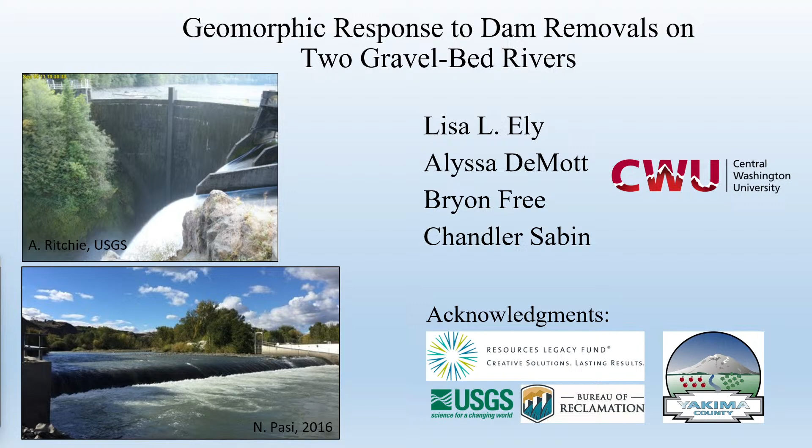Two dam removals in Washington State. At first glance, they look pretty different: the enormous, tall dam on the Elwha River in western Washington, out on the Olympic Peninsula, and then some of you probably recognize the Nelson Dam here on the Naches River. I'm going to be looking at what was the effect of these dam removals on the river itself, and I'm not going to focus as much on the fish. I heard you heard about fish last week more, but obviously the river has a big effect on the wildlife and the habitats and the creatures that live in and around the river.

So let's get going here. Okay, so Glines Canyon Dam on the Elwha River. It's tall and narrow. It was the tallest ever dam removal at that point in U.S. history. The Klamath River dam removals that just happened in the last couple years are, in terms of the volume of dam, bigger, but this one I think was still taller than the tallest of those.

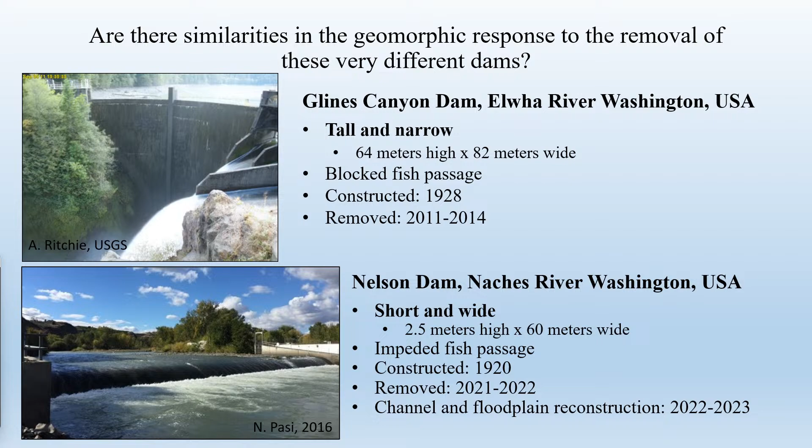How can you compare this? You know, Nelson Dam, it's not nearly as tall. But there are some similarities and differences, and we'll go over those as we progress through these two. I wanted to show the Elwha first because it gets so much news and it's really exciting. But the local dam removal, as we'll get to in the second part, maybe in some ways has a bigger impact because there are a lot more of these smaller dams around the country than there are the really big splashy ones.

Okay, so here we go, the Elwha River, the Elwha Glines Canyon Dam being removed in real time—no, in sped up time there. So I don't know if you missed that. You're going to get another chance in a minute for a slightly different view.

Before we go on, I just want to mention some of the important things with this. They took it down incrementally. This black line is basically the dam elevation going down over time. It actually started a year before this, but the first year, the dam was just going down through the water, the pool of water in the reservoir. So as far as the river is concerned and the impacts on the river, things really started happening when the dam removal first intersected this big pile of sediment that had been accumulating behind the dam for 80 years—sediment and large trees, large logs, wood. Keep that in mind as we go forward.

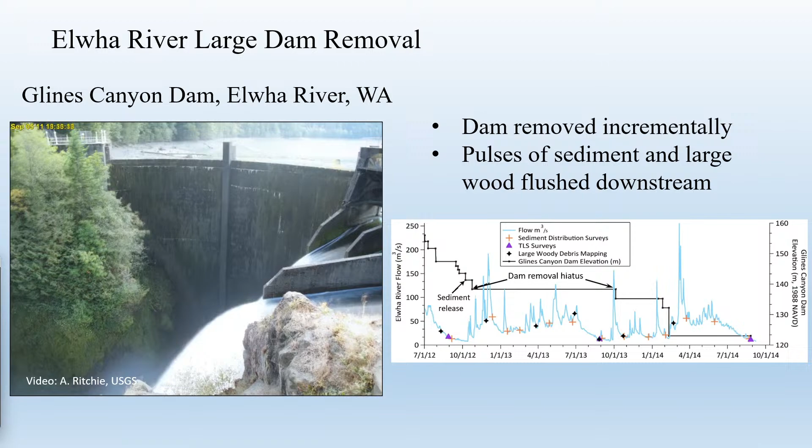Now we get to the point the lake, the reservoir, is gone. The dam's still being removed off screen here. You can see, not much happening here, but keep your eyes on it. See how the river's just going back and forth in that former reservoir lake sediment. Their plan with this was to allow the river to take that out naturally.

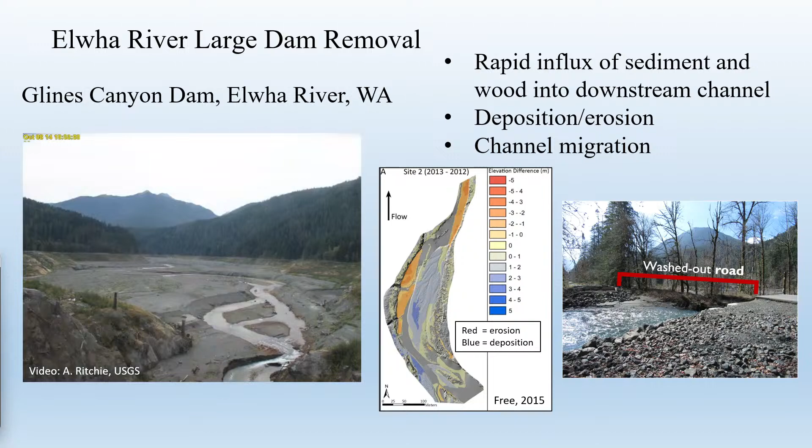Whoa, a big storm event happened there, and it did a big jog to the left. We did a survey out there and lost one of our tripods because I had put it 40 feet away from the edge of the river one evening, and we went back the next day and couldn't find it, because the sediment is so loose the river had actually migrated laterally and took our tripod out. But we saw it later, this orange thing sticking out of a gravel bar in the middle of the river, and we were able to go out and retrieve it.

So that's the excitement on the Elwha, and then just a little bit of what we did.

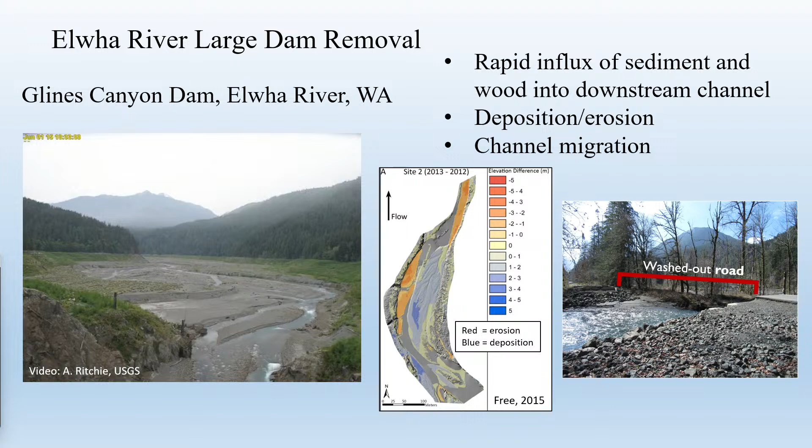So this was Bryon's project. We picked 4 sites downstream of the dam. Here's the dam at the bottom, and the river is flowing to the north. So 4 sites downstream, and then we looked during the dam removal time period at how the river changed in those sites over that time period, three years in this case.

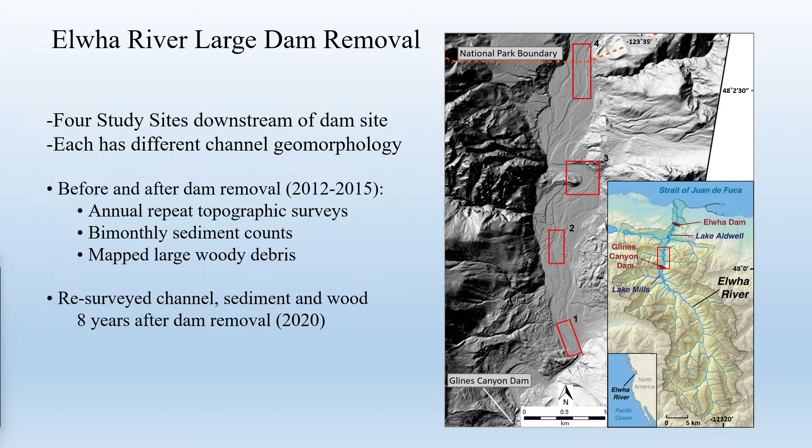And then later, almost 10 years later, my other student, Alyssa, came back and looked at what were the longer term effects.

So we'll just summarize briefly here. What did they find out?

If we look over here, this is before the dam was taken out, before the sediment was released anyway, and it's pretty coarse gravel here. That's because when the river didn't have the power, when all that was coming over the dam was water, it didn't have the tools to move back and forth, which is what allows it to pick up sediment and move it somewhere else. So it's called an armored channel, meaning you've got gravel across the channel bed that's too big for the river to actually move.

So it moves the finer stuff, like sand and silt, through, and then it just stays in one place. It's got an armor on it, and that causes the river to get kind of locked in place. That actually happened also on the Naches River, which we'll get to a little later.

Then, during the same site, this is all the same site, during the middle of the dam removal, you can see that a lot of fine sediment has filled in between some of these pieces of gravel. That happened not only between the gravel, but in some places whole new sandbars or gravel bars formed. So you get a new gravel bar forming where there used to be river channel, and it pushes the river over. That means the river starts eroding in a new place. Now it's introduced new sediment, or new wood falls in, and that makes the river push over the other way. Once you get that process started, the river starts going back and forth, establishing new paths and making, in some cases, multiple channels and a more complex river system with more complex habitats.

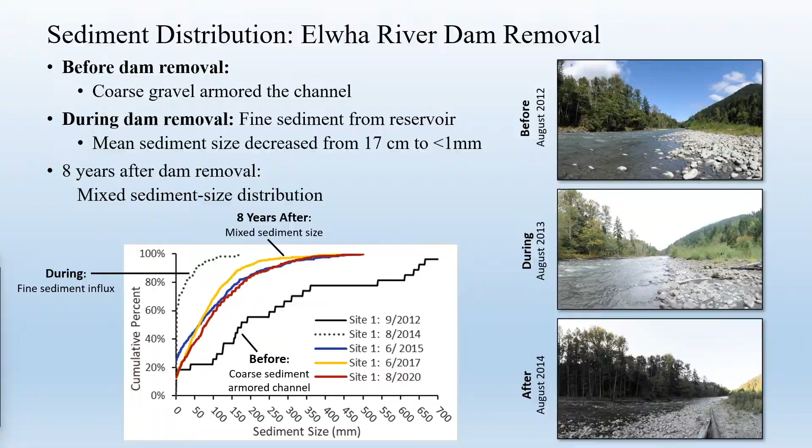During, it gets pushed way over to the fine end because it's this blanket of all that sand that used to be behind the dam got spread out downstream on the river. It basically covered up a lot of those old gravel bars, but it didn't necessarily move them right away.

And then Alyssa's surveys several years later, 8 years after, it's kind of reestablished in the middle between those two extremes. So it's really kind of a Goldilocks situation. That's because it's been able to start mixing that old sediment and the new sediment and come up with a size that is actually appropriate for the river to move and use and shift its channel around naturally.

And did I just turn this off? Okay.

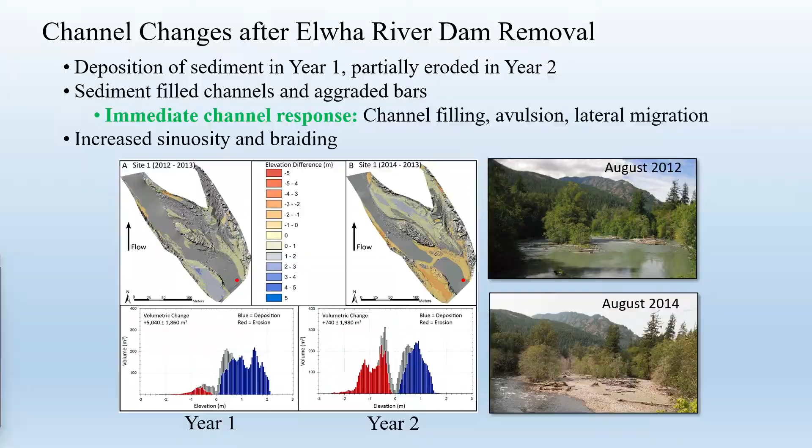And what I don't have a picture of here was there used to be a campground here called the Altaire Campground. This is in the Olympic National Park. There was a campground, and I camped in it when we were doing our field work out here. And we were camped like 2 rows back from the river. And the bathroom was behind our campsite, and then there was another row.

So I think there were like 3 rows of campsites. And by the time we finished, the bathrooms were on the bank of the river. And the first 2 rows were gone. Our campsite was no longer there. So the river did, again, what rivers do naturally, it started moving over to the left over here after, so all this green stuff is the deposition of this gravel here. So things went kind of crazy there.

So another big element with the Elwha Dam removal that was not the case over here is the large wood. So the Olympic Peninsula, how many people have been out there? Yeah, there are a lot of trees out there. Just imagine 80 years of trees that have fallen into the river upstream that got trapped behind the dam, and they're mixed in with the sediment on the bottom of the reservoir, kind of waterlogged. They all get released within a couple of years, and those big logs just got strewn along the channel initially.

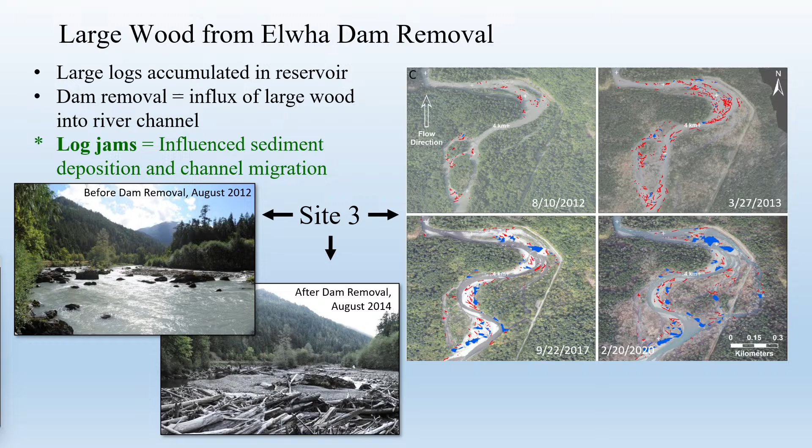Okay, initially then, a whole bunch of individual logs came washing down when the dam was taken out, and then they started gathering together as they were being pushed around by the river, and that's the blue. So the blue are log jams, multiple logs piling up together. And you can see by the end of this series in 2020, you've got way more. So over here, there's only 2 very small log jams in 2012. And by the time we get over here to 2020, it's maybe half and half log jams and individual logs.

So this is down in the lower part. This is August 2014, after dam removal, what one of these log jams looks like. So here's the same site, 2012, nary a log in view. And this is what it looks like 2 years later when there's a big accumulation.

So you can imagine then that these logs also served to push the river around. So you've got sediment deposited, you have log jams. The log jams are actually growing bigger and kind of stabilizing, and then that's caused the river to split or to move around, and it introduces a lot more complexity in the channel response to the dam removal.

So here's just a graph summarizing Brian's and Alyssa's work, and let's just look at a couple of the main points here. So if we go over to these graphs, start with the ones on the bottom, the channel sinuosity and the braiding index. Sinuosity is just a measure of how curly, how circuitous is the route that the channel took. And the braiding is an index of whether it's a single channel, which would have a braiding index of 1. And so it's a measurement of how many threads there are to this river channel.

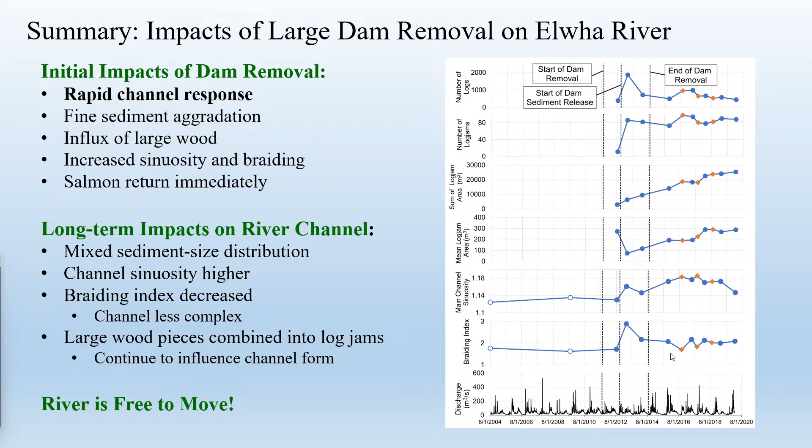So one of the things we've found here is you got this big spike of stuff happening right away, but then, for example, the braiding index, that kind of went back down and it settled at a new number higher than it was before, but it's not fluctuating as much anymore. The sinuosity, that's the curviness, that kind of continued to go up, and maybe now it's going down. It looks like that hasn't really reached a new complete equilibrium yet at the time that we did this study.

And the log jams are kind of interesting because the number of logs has sort of gone down and maybe even decreased a little toward the modern day, but it's not like they're leaving the system. They're just getting grouped up into larger log jams. So the number of individual logs that we mapped went down, but you can see that the area of the log jams continued to go up. So they're basically just getting collected and making bigger and bigger log jams that will probably be there for a longer period of time. So that's, I think, kind of the Elwha story. Yeah, that was our summary.

And I should say down here at the bottom, the river, in this case, is free to move around. It's in a national park. So they tried to keep that road open. And finally, they're just like, okay, river wins. We're going to let it move back and forth and do its thing.

And a little bit about the fish. So a lot of this dam removal was driven by fish habitat because neither of the dams had fish passage. So there were 2 dams. They didn't have fish passage. And I think the fish were there like knocking on the door for this to be taken out, because they reoccupied immediately after the dam was removed. Well, not immediately.

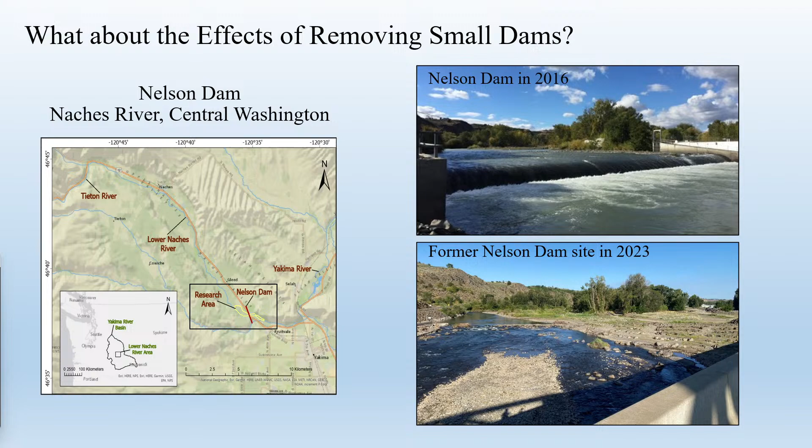Okay, so this part, if we did it right, you will not be blasted out by really loud music. So if you hear faint music, that's intentional. Don't feel like you're missing out on something. And I'm just going to show the first part of this drone flight through the reconstructed channel. But if you want the full experience, you can scan that QR code and you can blast it at home and rock out to the music.

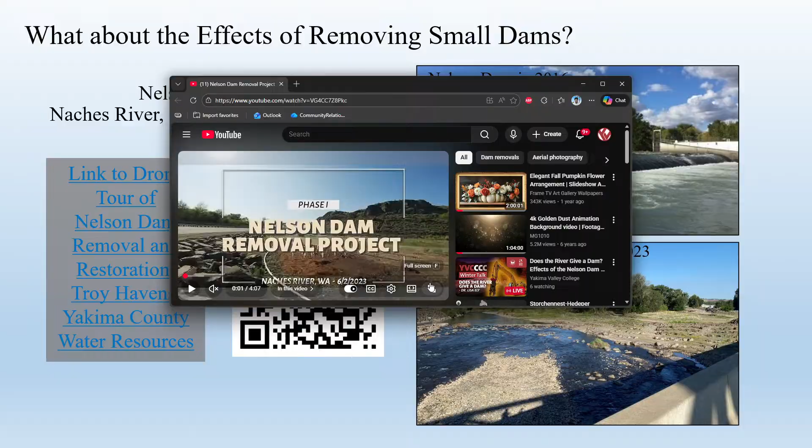Okay, so we're going to try to get this. It's on a YouTube, so I have to go to another site here. Okay, that part worked. I think I have to put this. Oh, okay, so it's not too bad. Whoops, but now I lost it. I'm going to try to get it full here. You might get tired of this music after a while, though.

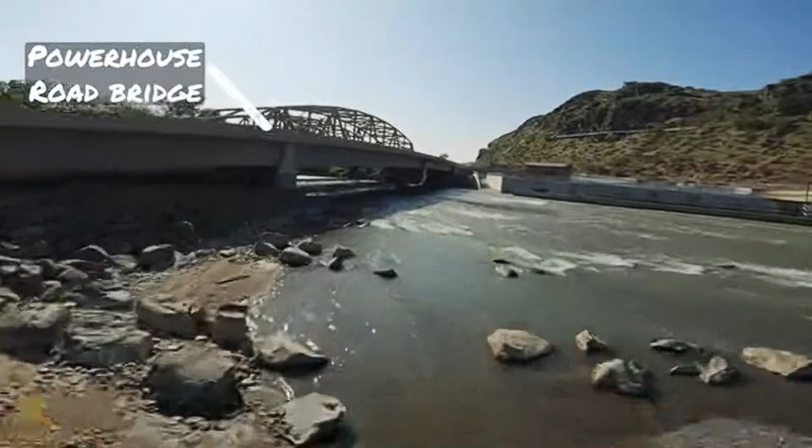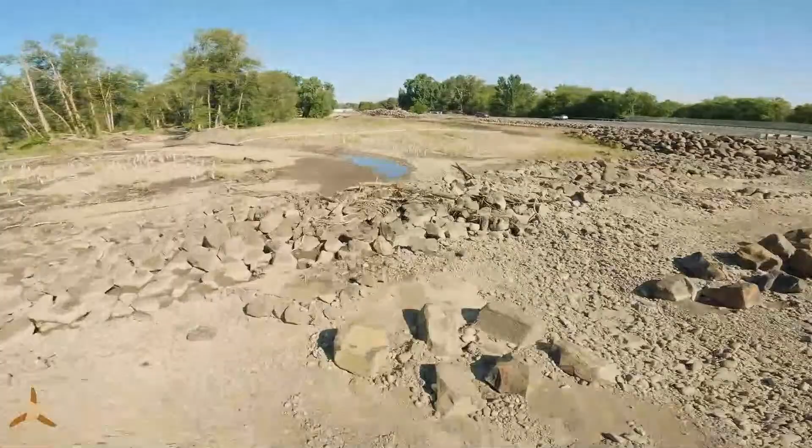So this is where the dam used to be. And then he's going to fly up through this reconstructed floodplain. So part of this was they built a new levee set back from the river, you can see on the right here, and a couple of pilot channels. I have not been out there since the floods last December. So I'm pretty interested to see what happened out there during that event. Planted a bunch of new vegetation. Well, you can read what he wrote on there as well as I can.

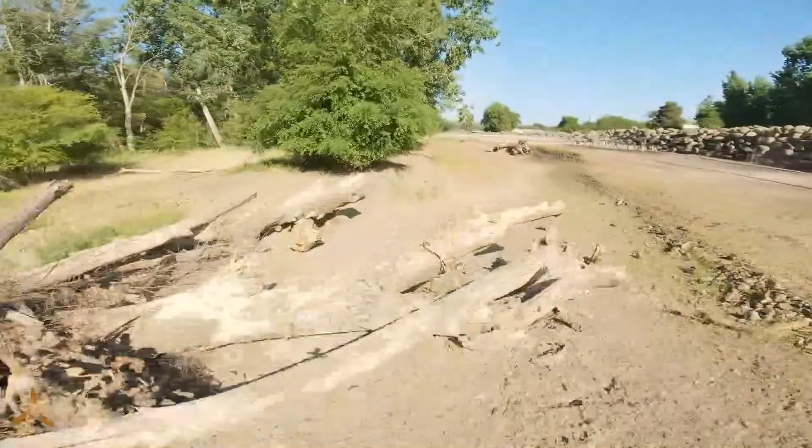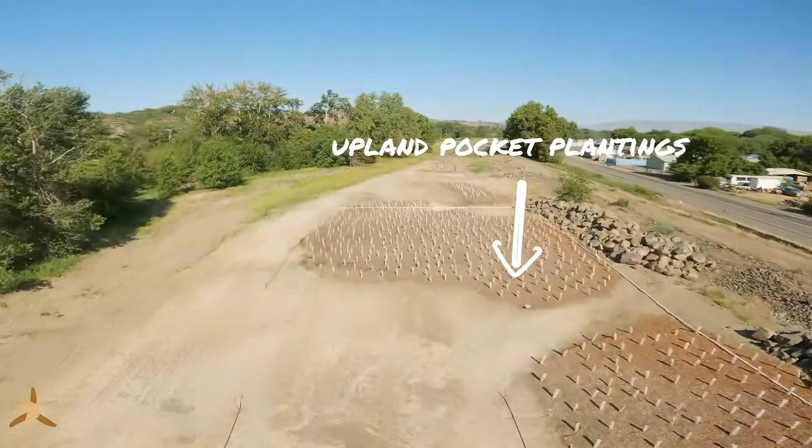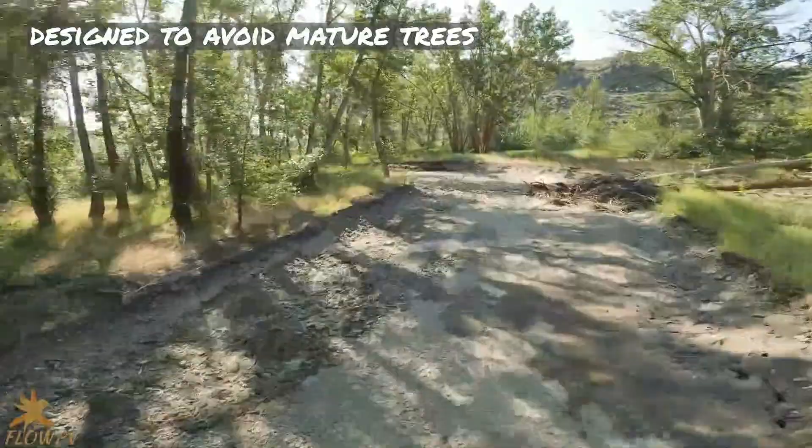So we're going upstream here now. I think we're going to come down. Yeah, so here's the other pilot channel. They put intentionally some large wood in there. But it just means a channel that they'd like the water to go down. So they're kind of saying, hey, when there's a big flood, please come down this way. It's dry most of the time, right? And until this year, I don't think that North Channel had water flowing down it since this project was put into place.

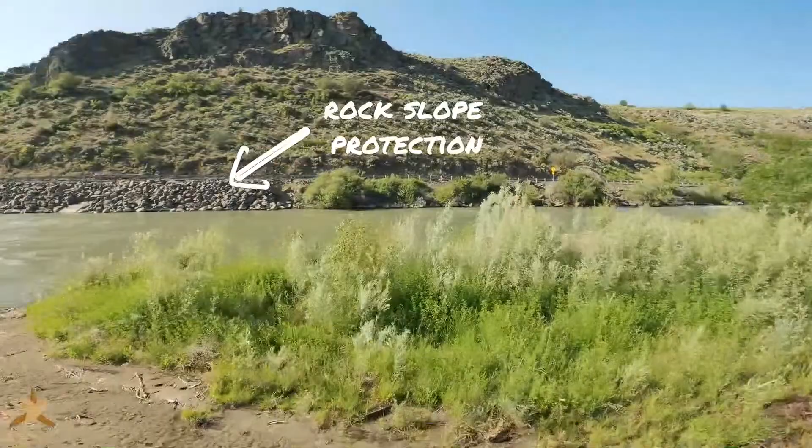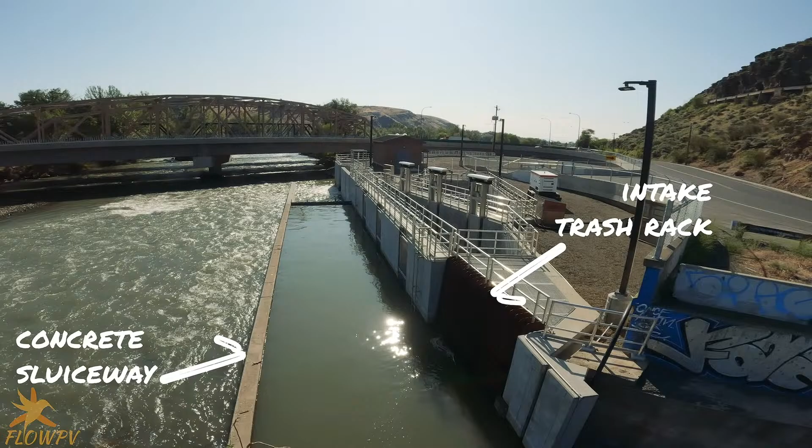Okay, there's the bridge that I'm sure you've gone over, and see how the channel, the water's a lot rougher in this part, more ripply. That's because they put some larger boulders down in there. Oh, I don't know if we want to keep. It's kind of fun to watch, so it's not that long. But if he starts going back up the same place, we'll stop it. So it's a very complex project.

Yeah, I think we're kind of going back up where we already went here. So I'm going to try to. There's the pilot channel. Okay. Oh, you're going to help me here? We can just close it. Okay, that's good. Yeah. Awesome. Thank you.

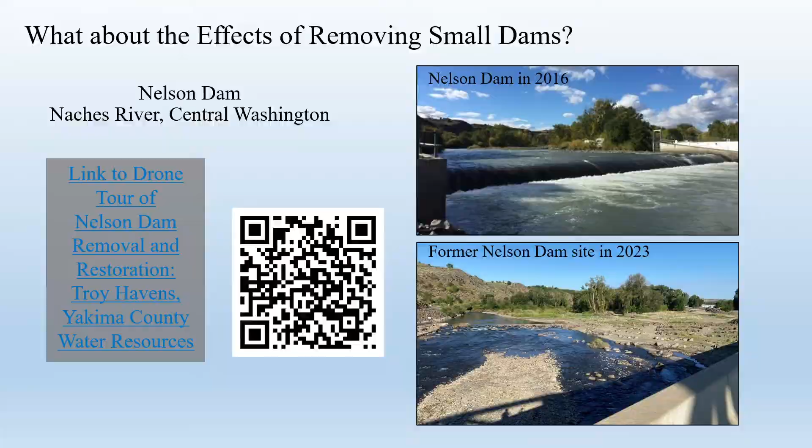So that was put together by Yakima County, giving an overview of the project. Now, let's look at what this one did to the channel. So this is the same thing we just saw, but this is over here before, from just not a very big dam, 8 feet tall, but you had sediment. It allowed sediment over the top because it actually filled up to the top with sediment. So gravel could get over, but it was basically putting this 8-foot wall in the channel.

So you had a wedge of sediment that accumulated upstream for a couple miles. And that at times, according to Yakima County, caused some flooding because you'd basically filled the channel up higher than it would have been naturally, and then a relatively small flood could overtop the old levee and get into areas along the sides where you didn't want it. The fish passage was not great. It apparently filled up with gravel periodically.

So you had this big wide channel upstream that occasionally had flooding, but downstream you had an armored channel similar to the Elwha, where there was large gravel on the channel bottom that was too big for the river to pick up and move on a regular basis. So that's a before, and then here's right after they put this reconstructed channel in that we just saw in the video.

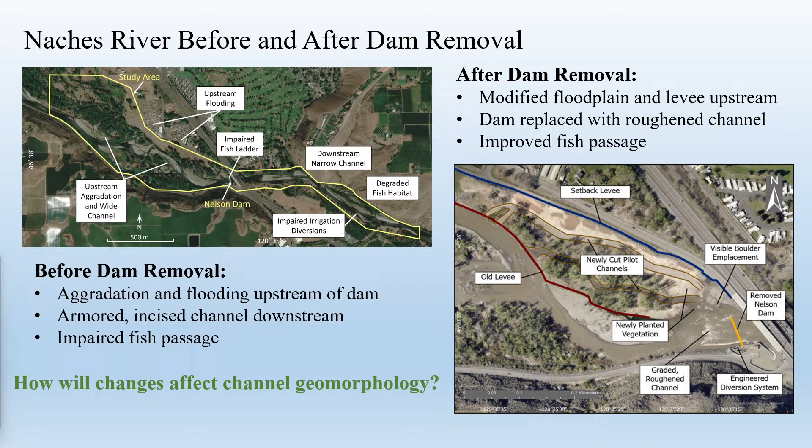So some of the things that they're trying to alleviate is alleviate the flooding here by building a setback levee, allowing sediment to go downstream. Oh man, I really went back there. There we go. But still allowing the diversion. So this is a complex challenge to keep all these different things going.

So we looked at how did it affect the channel geomorphology? Well, this is still ongoing. We don't know the total answer yet. So I brought a bunch of students down there many times in classes, in summer. A lot of undergraduates from Central Washington University went back and forth across these gravel bars measuring sediment. And we were trying to figure out where's the sediment going, how much is moving, where's the channel eroding and depositing. So the different things we worked on, mapping, sediment surveys.

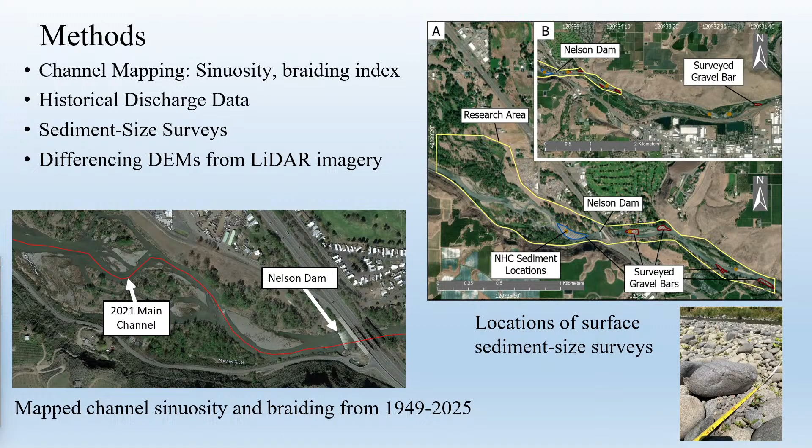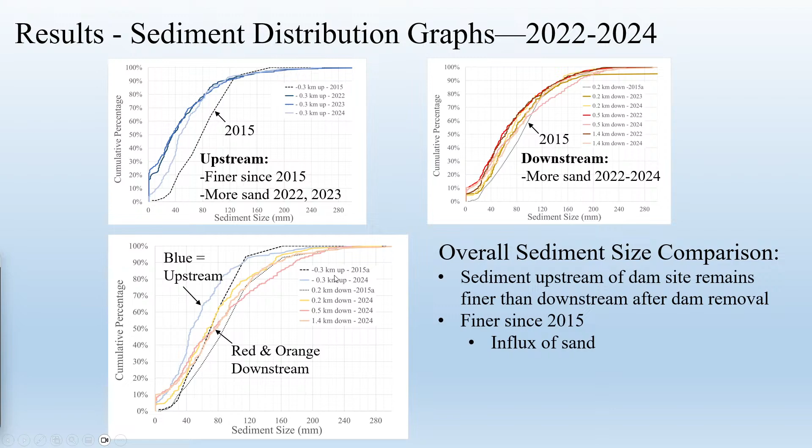Downstream remained coarser, because remember, coarse is to the right. So the sediment downstream of the dam was coarser than upstream. And that's been pretty much the case since an earlier study that we didn't do, but that was done when there was a survey of the Naches River commissioned by, I think, Yakima County. They found that this dotted line is the sediment downstream, the blue line is upstream. So there's been this difference, coarser armored sediment downstream of the dam, finer upstream, and that seems to have persisted for at least the last 10 years, probably longer than that.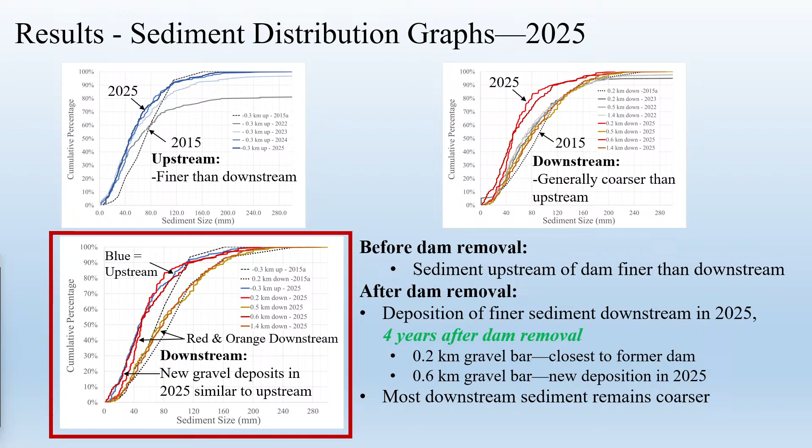Okay, now we're going to look at the one data point we have from last summer. So as I said, we haven't gone out there yet since the big floods in December. But if we look at this, 2 of these red sites, which remember are the downstream ones in our surveys, have moved to the left. So they're actually getting similar in their sort of Goldilocks sediment composition to the upstream ones. And that's what we want to see in a river restoration, because it means the river's now starting to become capable of moving this coarser sediment around that it hadn't moved when the dam was in place.

So as I said, you may just have to be more patient with seeing the effects of these smaller dam removals, but it's kind of moving in the right direction. These two sites that moved over here, you see the other ones are still stubbornly over in the coarser part. The two that moved to the left were in sites that were either the first one downstream of the dam, or it was a pile of new gravel that had been deposited against one of the former sites. They're both kind of closer to the dam. The farther away ones haven't really changed yet. So that was 4 years after the dam removal. We're just starting to see some changes downstream.

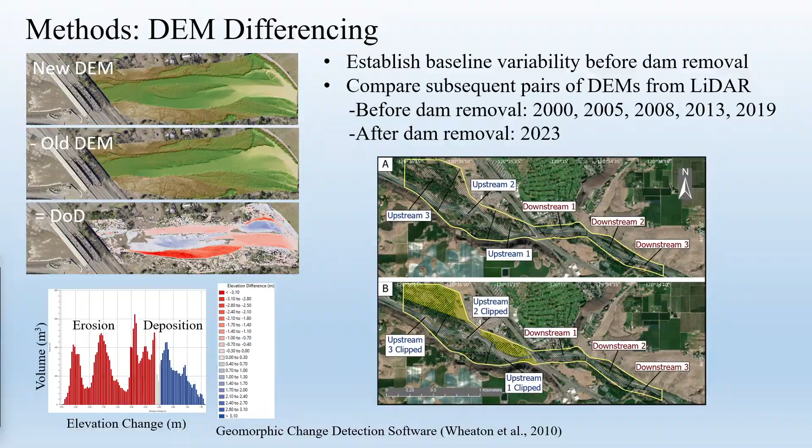Now I'm going to take you through a series here of these red-blue changes in the river. Red is erosion, blue is deposition. We were so fortunate on the Naches River that Yakima County had acquired LIDAR imagery, so it's basically aerial imagery of the river, starting in 2008, every few years. This is a remarkable data set. Most places don't have this to work with. So we were able to say, okay, what happened over 10 years prior to the dam removal? It kind of sets a baseline, and then we can compare the after dam removal to that baseline.

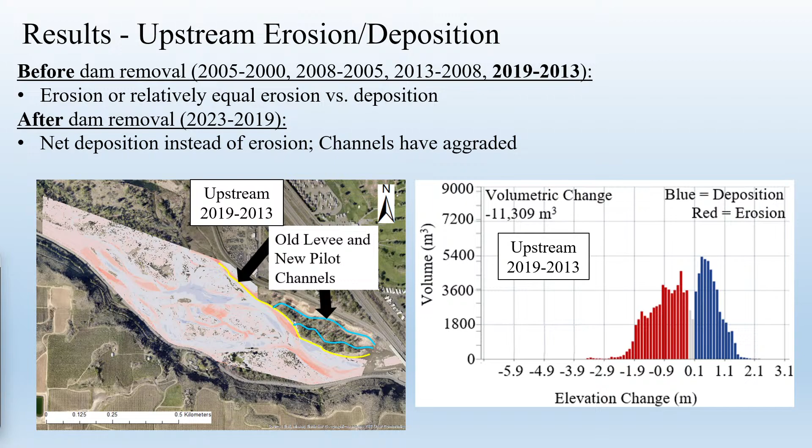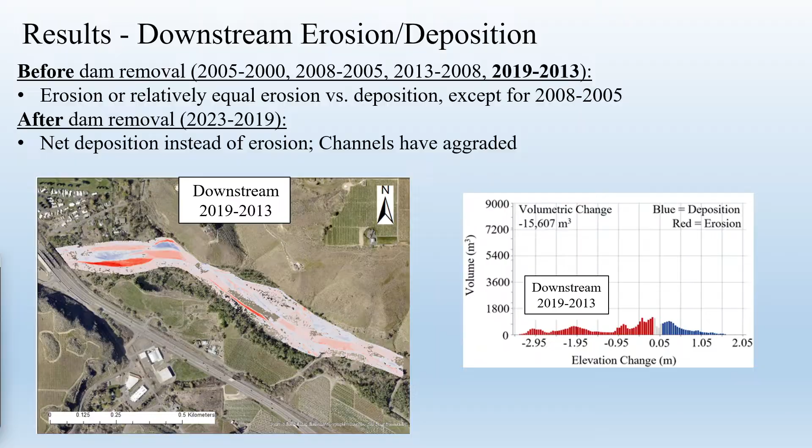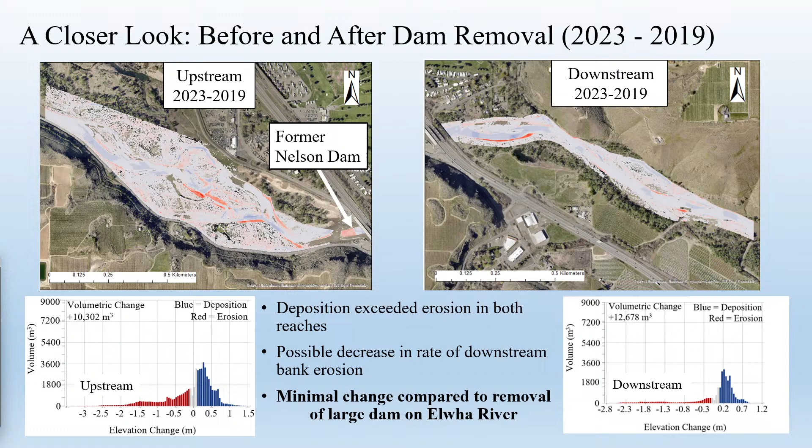This is for both upstream and downstream in the years spanning the dam removal. So it was like, oh, okay, we wanted to see some really dramatic change. Oh, a bunch of sediment eroded from upstream and it's gone to downstream. But no, they both got deposition, as it turns out. So as far as the immediate effect, it was pretty minimal compared to the big dam removal out on the Elwha.

But that's not quite the end of the story yet. A little bit more on bank erosion. This is something people have been interested in, and basically we didn't see a big surge in bank erosion from the dam removal. Some people saw that as a positive. Again, I think we just need a few more years of data to see what really happens, especially this year. But...

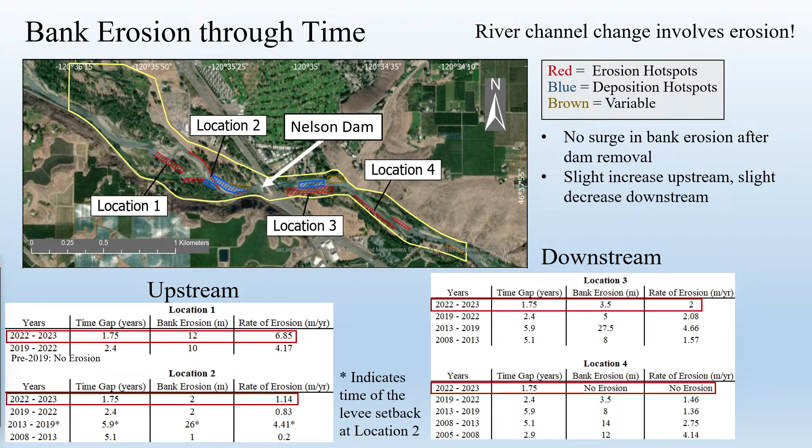Here's something I want you to keep in mind: if one of the goals of these restoration projects is to see more complex habitat and multi-threaded channels, that involves some kind of erosion. The rivers have to pick up that sediment from somewhere and move it somewhere else. We'll get back to this at the end, maybe in questions, but it's a big challenge for restoration, especially in an urban environment like this, because you have to balance wanting this wild, messy river that goes all over with multiple channels.

But wait a minute, we have over 100 years of people who have established infrastructure along rivers. This river goes through Yakima—it's an urban river. Then think of rivers like the Mississippi in New Orleans. So it's not a simple question of letting rivers run wild where they want to go, like maybe they can in a national park like the Elwha. There are multiple stakeholders and multiple uses, and all these things make challenging work for the planners.

I'm just the geologist who goes out and says, this is what rivers would do if you do this to them. But the real challenge comes with the people who take that information and implement it in a way that's constructive and reasonable for their community and for the habitat, for all the multiple factors involved.

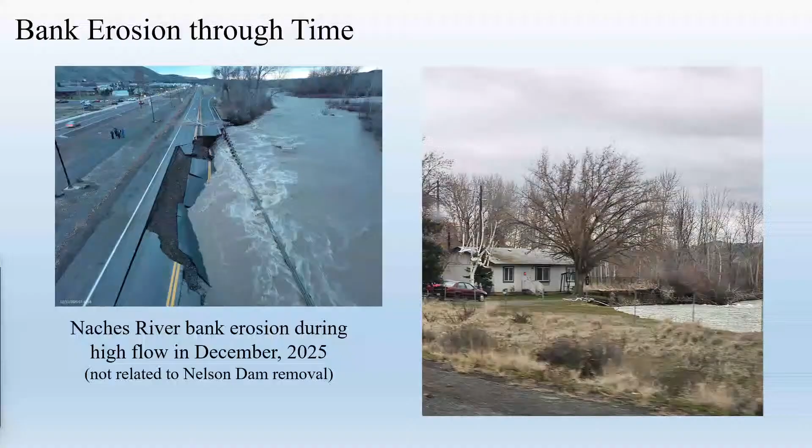I think the plan that was implemented at the Nelson Dam had a lot of forethought, so I don't want anybody to get the idea that it was a bad plan or that it caused erosion. That's not the case. Okay, so let's wrap up here.

The big dam on the Elwha River had a rapid release of sediment and wood. There were immediate channel changes—they were dramatic, going all over the place, with big log jams. It washed out roads, and then it kind of decreased in the decade or so after that. It's still moving.

The Nelson Dam on the Naches River may be more of a delayed response, but four years later, it's starting to show some changes in the area downstream, in particular, of where the dam was. I think for these smaller dam removals, the change is really dependent on the timing of the large flows—you just have to wait for there to be water that actually moves things around.

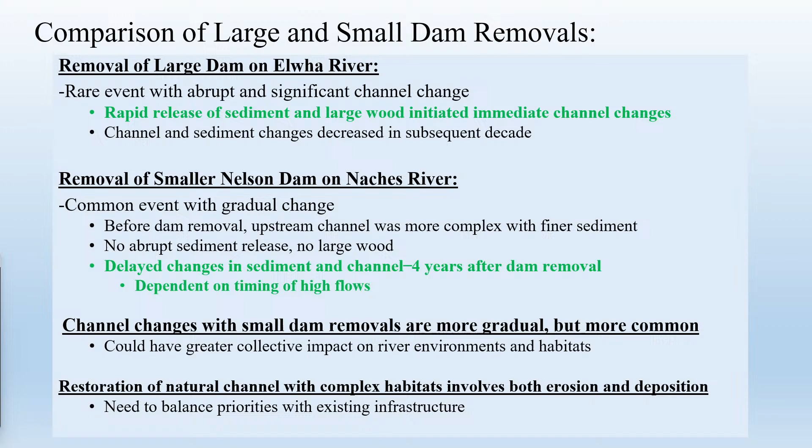And then the last couple of points here: maybe the small dam removals have more gradual channel changes, but these are much more common. We have a lot more 8-foot tall dams around our country than we have 80-foot tall dams. So taken together, perhaps these have a bigger collective impact, and certainly they have a lot of local effects on communities and on natural habitats.

And then just a reminder that restoration of a natural channel with complex habitats does involve both erosion and deposition. That's just something that has to be planned for as we see more of these dam removals in the future as a means of trying to restore natural channels, and there's a need to balance priorities.